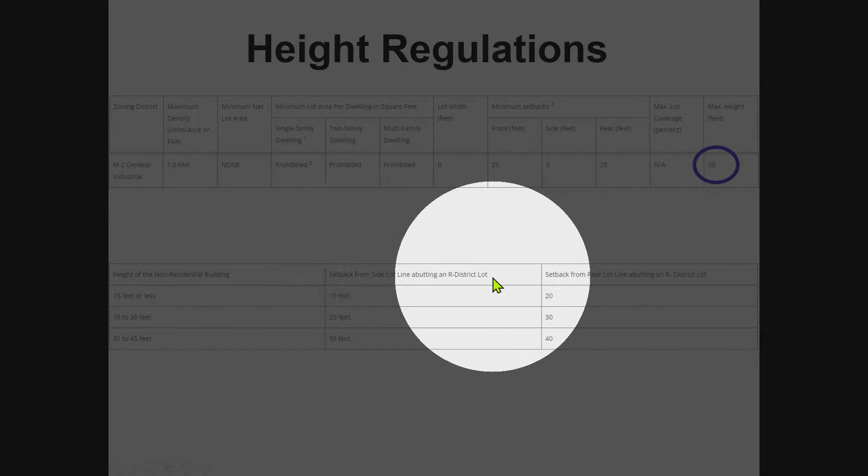Then also the second screenshot is a visual showing, based on the height of a building, what the required setback is from a residential zoning district. The purpose here is to show that there is a graduated setback. As the height of a building increases, the setback from a side property line or rear property line increases as well, at the rate of 10 feet for every 15 feet in height of the building. Of course, that chart only goes up to 45 feet in height, and anything above that basically caps out at 30 feet according to the zoning code. But I wanted to make sure you're aware that there is that graduated increase in setback.

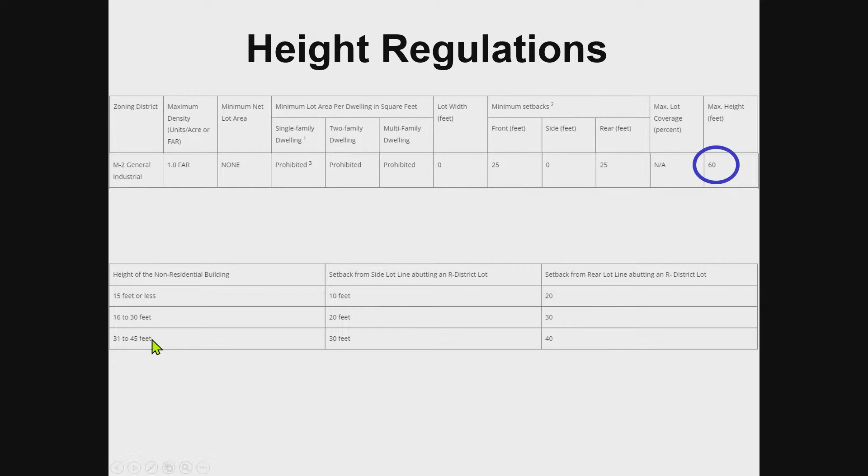There are two types of industrial zoning districts, M2 and M1, with the M1 district basically being referred to as almost indoor industrial, and the M2 allowing a lot of outdoor uses and more intensive uses.

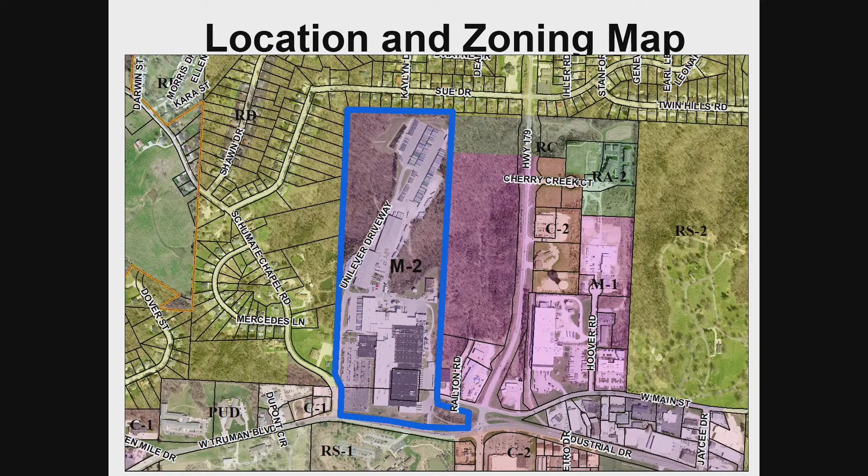So their request is to take one building located on their site, demolish it, and replace it with a new building. The new building would be an automated storage facility. I'll leave them to describe the details of that, but the building would be at a height of just under 110 feet. And as 60 feet is the maximum, the purpose of the request is, of course, a variance of 50 feet to permit the taller building.

So here's a visual showing where that building would be located. North is now to the left-hand side of the screen. West Truman Boulevard is here on the right. Their main manufacturing facility, closer to West Truman Boulevard, is there. There would be a building addition right about here that's not really highlighted, as it's not needing any type of variance, but then the taller building located there.

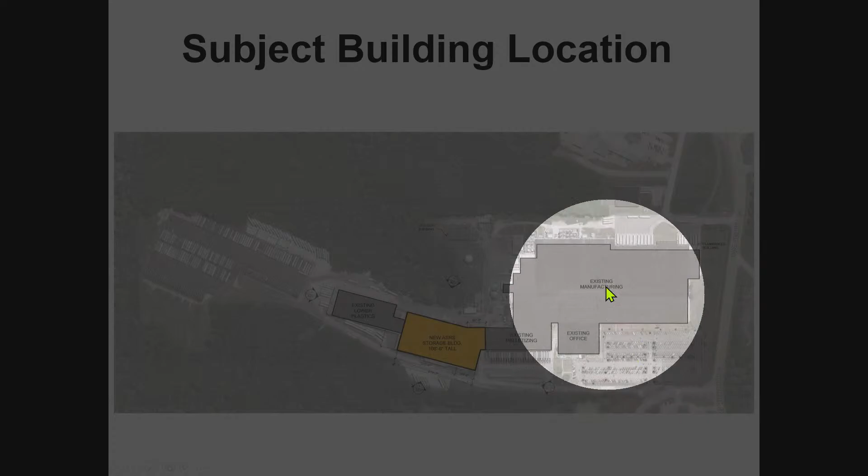And you see some of the rest of their site. They have another existing building and then trailer parking toward the rear of their property, as well as a customer parking area and various other uses.

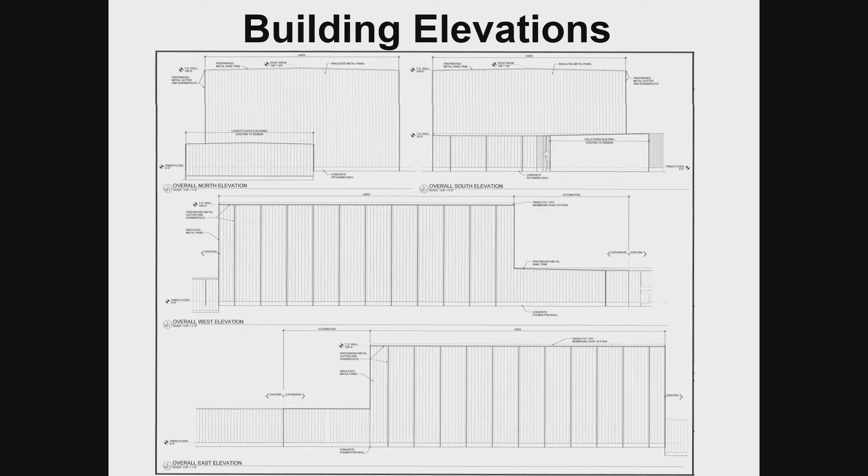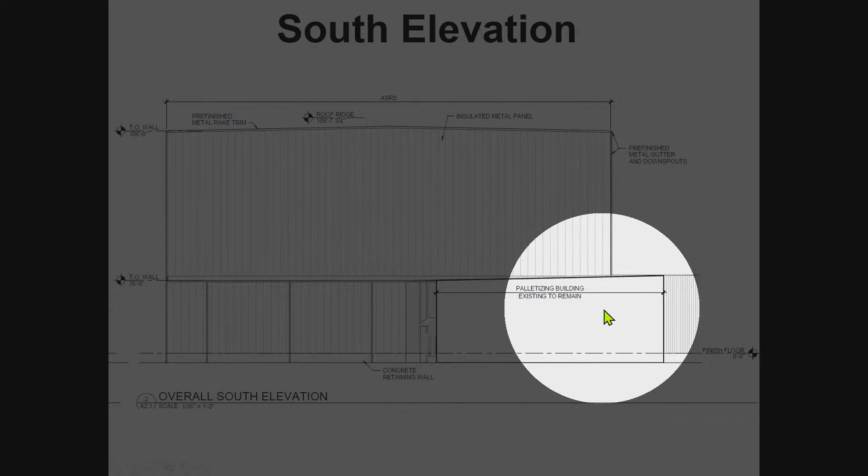Within your packets is some building elevations that basically show the height of the building, from all 4 different directions. I'll provide one that's zoomed in - this is the south elevation, facing Truman Boulevard. As you can see, the building is shown at a height of just under 110 feet, 108 feet, 7 3/4 inches, located at the highest point of the building. For reference, some of the existing buildings are shown here as well, shown at a height of 35 feet, so you can see the height of some of the existing buildings in comparison to the proposed.

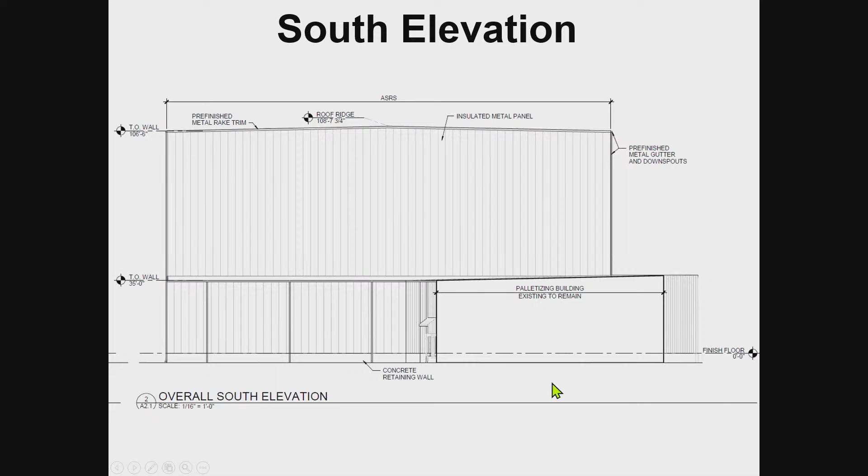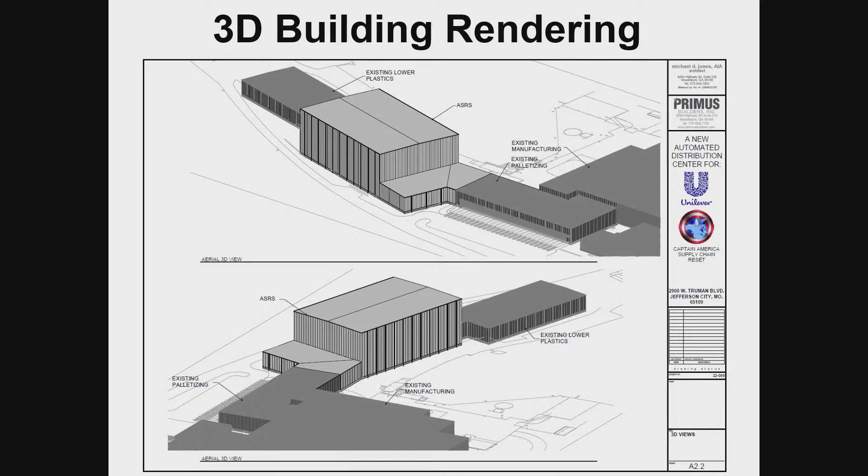They've also provided a 3D rendering of the building, so you can see the building in comparison to some of the other existing buildings on the site. Also an interior layout with a lot of the different mechanical equipment that's rendered there as well.

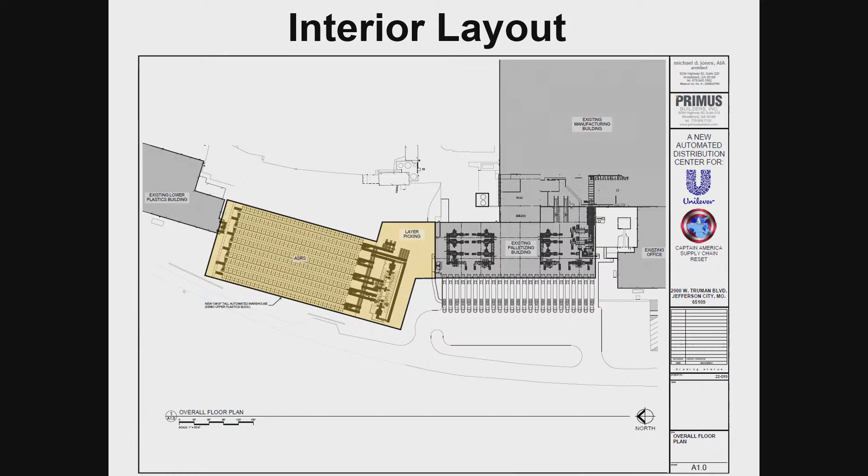I think it's worth pointing out that the rest of their site is essentially developed. The portions of undeveloped property that they have are largely rough terrain, essentially a valley located here and over there, a gradually descending slope. Some of the terrain of the property ranges from 600 feet to about 720 feet across the property, so about 120 feet of elevation change within the property boundaries.

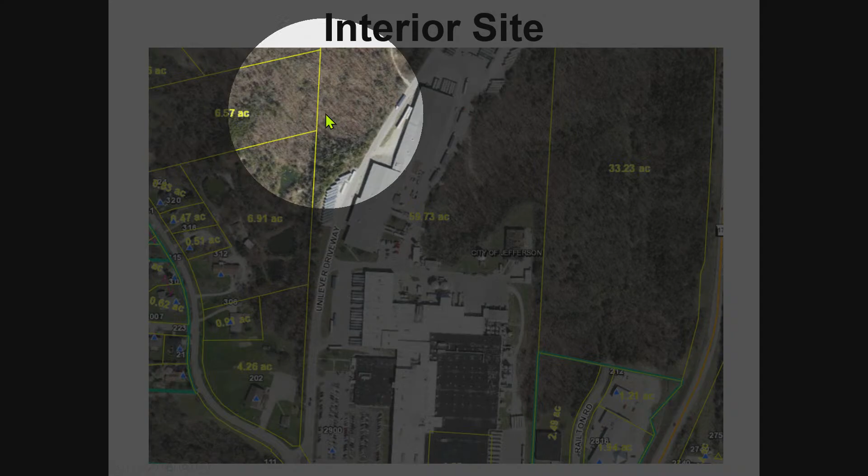I think it's worth pointing out that the surrounding area is heavily wooded with mature trees, and in particular along this property line, there is a row of tall trees.

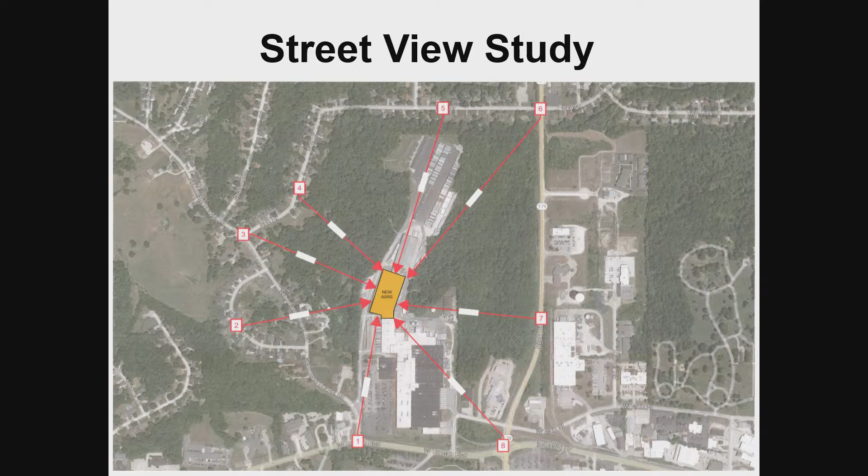Within the application materials was a street view study. The applicant provided pictures from surrounding locations around the site, as shown on that visual. Each of those sites, a little hard to see, might be easier to see within your packet materials, gives a rendering of the location of the building from the different sites.

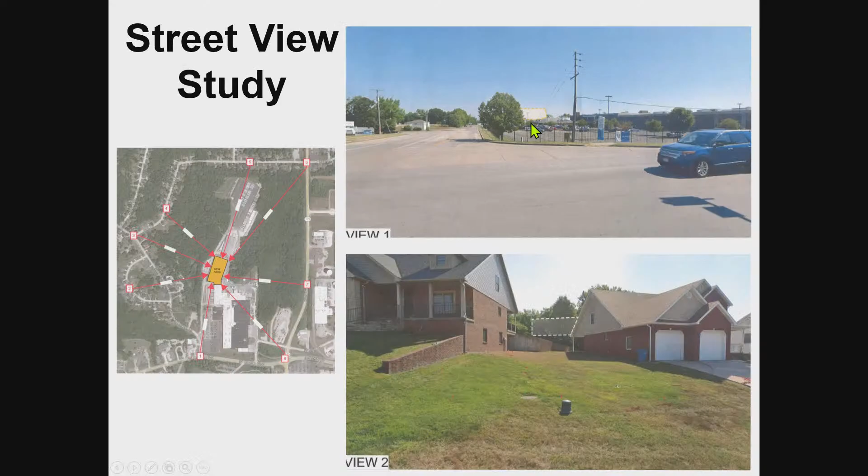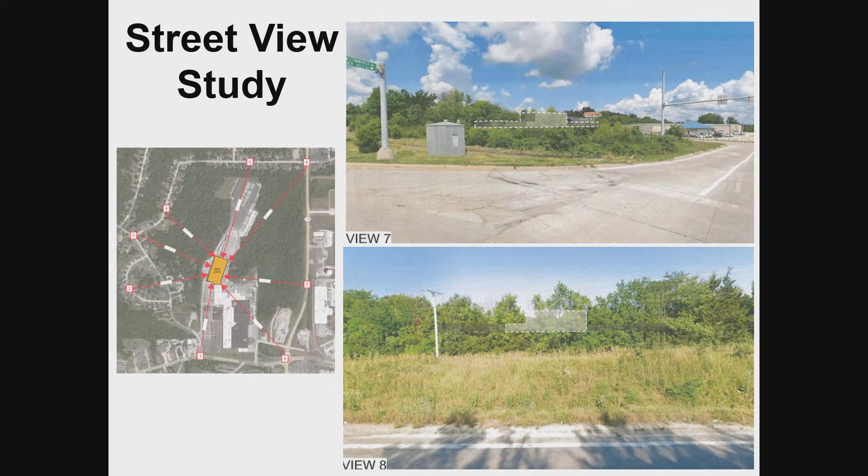As mentioned, we have received some items of correspondence on this case, which you've all had an opportunity to read. The role of the board in ruling this case is to review it in accordance with the required findings. The application materials provide responses to the findings, provided by the applicant, and staff within the staff report gave some commentary on the required findings as well.

With that, Mr. Chair, I'd be happy to answer any initial questions before turning over to the applicant to present. Board members, any questions? Okay, all right, thank you.

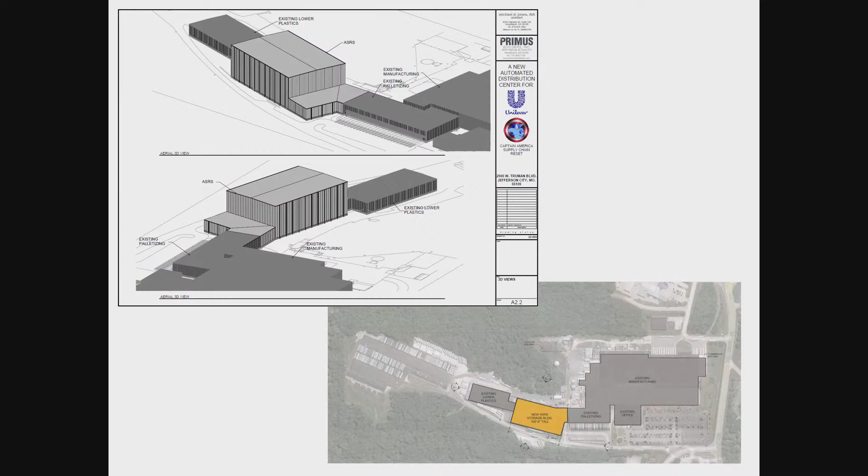Anything further? Do you happen to know, with your building occupancy and type, what the maximum height allowed with the building code is? So in the code, it would be 55 feet normal plus 20 for sprinklers. And they do have an exception for 1 story, which this building is - it's only occupied at the ground level, there are rack levels, but it's accessed by crane. There is an exception in the building code for unlimited height based on mechanical means, so that has been an effective approach to the code in other locations in the country that we've used.

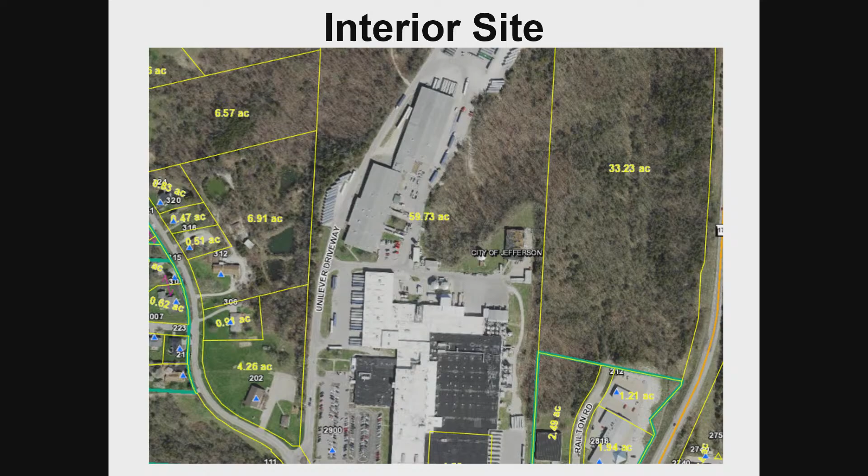Thank you, Mr. Chair. As mentioned previously, the required findings are contained within the staff report. There have been responses by the applicant to the required findings, and also commentary from staff on those findings. I'll leave you to read them over individually. We do have the recommended form of motion shown on the screen: a motion for approval of a 50-foot variance to the 60-foot maximum, to allow for a 110-foot tall building. Any questions for staff?

Thank you. Okay, would someone like to make a motion in this matter? Sure. I'd like to make a motion to approve a 50-foot variance from the required 60-foot building height maximum for the M2 General Industrial Zoning District, to permit a 110-foot building height. Is there a second?

Discussion. I just want to thank the residents again for coming in today and taking the time to compile that information, and the representatives from Unilever for coming in and explaining this and interacting with the residents. Mr. Wiskirkin had the concern about noise with the speed bump and being able to contact Unilever, and I think this was a good opportunity today, all in the same room, to talk about those issues so we can continue to be good neighbors in the city. If we could get a contact number, that would help. We can't call. I think we can find someone that can get you one. Okay, any other discussion?

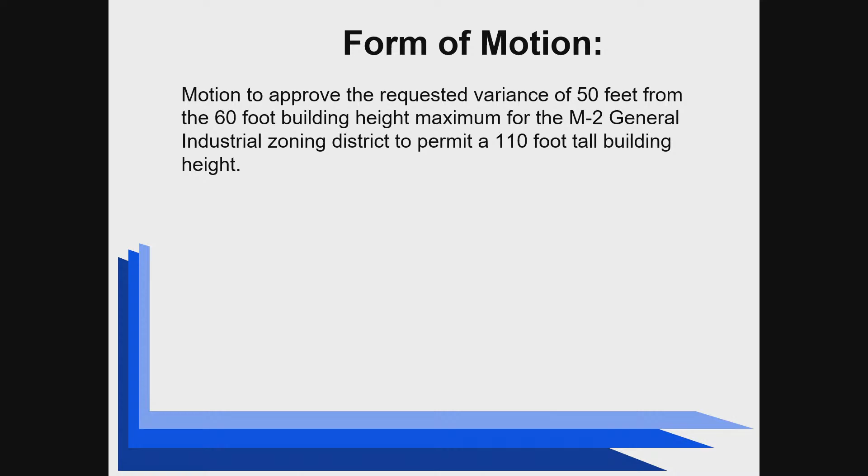Once again, we're seeing, for lack of a better word, the price of progress. I do appreciate this employer, has been in this town a long, long time, seems to be a very good employer. As the world changes, you have to change production and distribution, I understand and realize that. In difficult markets, whatever you can do to improve your systems, that's what you have to do. Again, we thank everyone for participating in this discussion. This is the reason for these meetings, so things can be said and things can be heard. Anything else?

Ms. Lisa, let's do a roll call. Hake, aye. Lacey, aye. Schaefer, aye. Michael, aye. Eichner, aye. Motion carries. Congratulations on your project, we look forward to your progress in the future in this neighborhood.